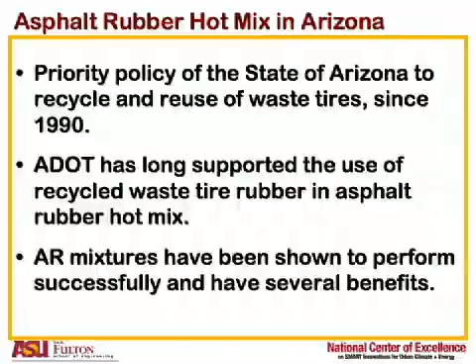I prepared this slide to show you, and by no means is this a comprehensive effort of what's going on. But when we talk about asphalt rubber, asphalt concrete friction course, and what we do at Arizona State University in terms of trying to understand the behavior of this material...

We have done some binder performance studies, looking at binder modification and how it improves the viscosity-temperature relationship at high temperature as well as low temperature. We looked at mix performance, and today we've seen a couple of very good examples of mixture performance and how the AR-ACFC actually performs in the field, as well as how we can capture that in the laboratory.

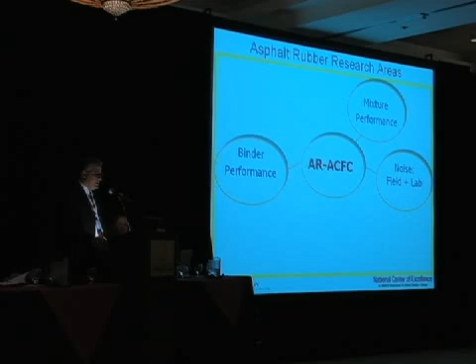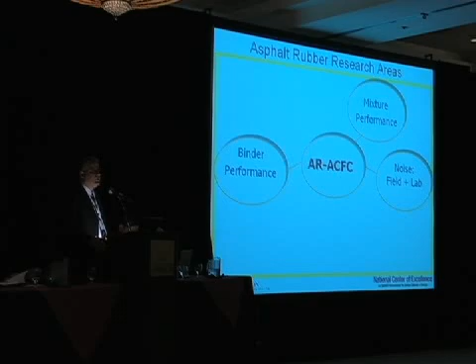You will hear later in this conference about noise issues. This has been touched upon earlier, but there are more in-depth technical papers looking at why the ACFC actually reduces noise in the field, and what we can do in the laboratory to capture that. So there'll be a couple of exciting papers on that later on.

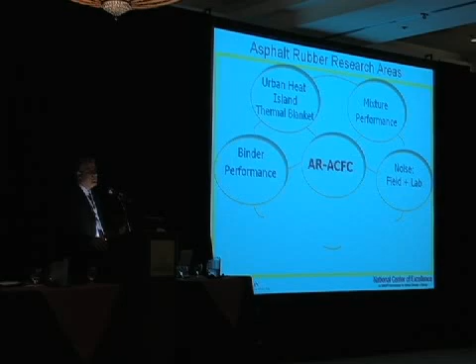On the urban heat island, Mark Belshe presented a very good overview of the heating phenomena or mechanism of pavements, especially in urban regions - the thermal blanket effect that's actually affecting what's underneath. That's another important area.

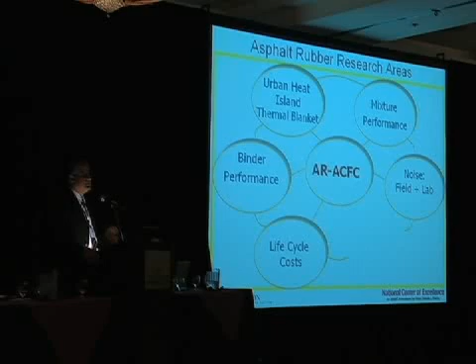I've seen, and we have done before, life cycle cost analysis. You pay more upfront for these materials, but if you look at the life cycle cost and maintenance issues, you always come out on top as a winner. And today, in the next 10 or 15 minutes or so, I'll talk to you about tire wear emission.

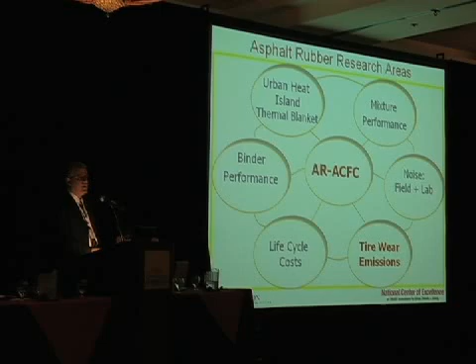How are those surfaces contributing to the air quality that we have in urban regions? This project actually started three years ago. I don't know if George Way is here - we were walking one time after a meeting and discussing with Professor Allen that most of the dust we have in the valley isn't really only dust. There's a lot of particles, a lot of pollution that comes from tire wear. So we were contemplating and thinking, well, can we do something to quantify that?

The whole idea, when we thought about it, was looking at whether asphalt rubber asphalt concrete friction course, the road surface layer, could result in less tire wear. And in fact, this is what we were thinking - it's actually going to produce less tire wear. Here I'm not picking on Portland cement concrete mixtures, because we do a lot of work in this area as well. It just happened that most of the highways we have in the valley are Portland cement concrete, and they are being overlaid with ACFC for noise mitigation.

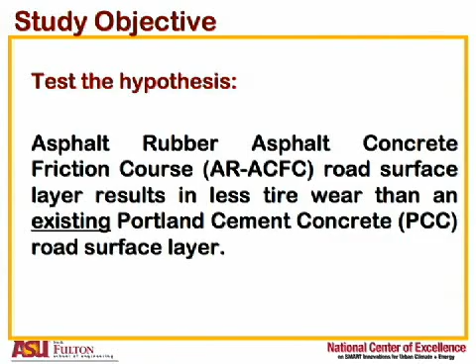So we have designed 4 tasks. The first one is looking at particulate matter, PM. If you are an environmental engineer, you know exactly what that means. These are emissions from on-road vehicle traffic during typical rush hour conditions on a highway. The idea is to do this for an ACFC and a PCC, before and after the overlay.

We were to collect and analyze samples in order to determine what pollutants we have in the aerosol. We needed to do some chemical analysis on the tire treads themselves, trying to identify what are some of those tire wear markers, what chemical compounds we can identify in our samples when we collect it. So that was an important task to include in the study.

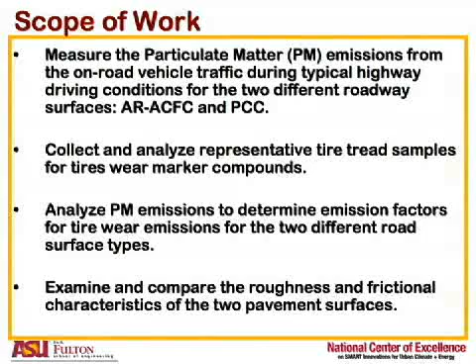We analyzed the PM emissions. We determined some factors, and we were able to determine the tire wear emission for the different road surfaces. So this is the analytical part, if you wish, as part of the scope of work here.

And then finally, we were interested to quantify something we have known or seen before, but we thought it's a good opportunity to look at the roughness and friction characteristics of these two different types of surfaces that we have.

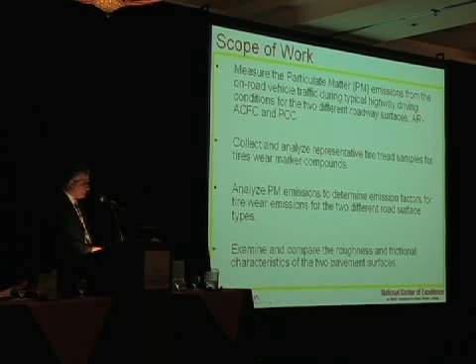Just a couple descriptions on PM itself: it's regulated by US EPA. You heard about this in the opening session from the lady from the EPA. It has been shown to affect human health, actually worsening the air quality in urban areas. A lot of times when we talk about PM, we refer to sizes, PM10 or PM2.5, in microns. So again, very minute, small particles suspended in the air.

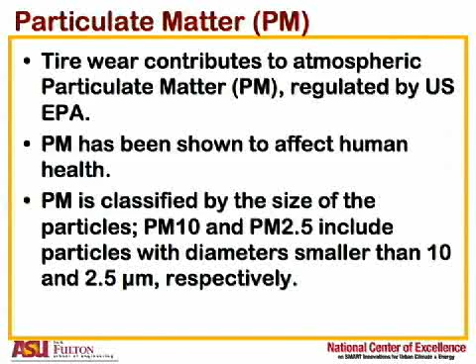Vehicle emissions are a significant source of both PM2.5 and PM10. If you consult the literature, a lot of studies, not specifically what we have done here, talk about the contribution of the different pollutants as part of the PM2.5 and PM10.

Advancement in vehicles, even if we go to zero emission vehicles, you are still going to generate some PM because of tire wear, road wear, brake wear, and so forth. And even some resuspended dust aggravated by traffic.

Typical values for tire debris in the literature, you're looking at about 5 to 7% of that PM10.

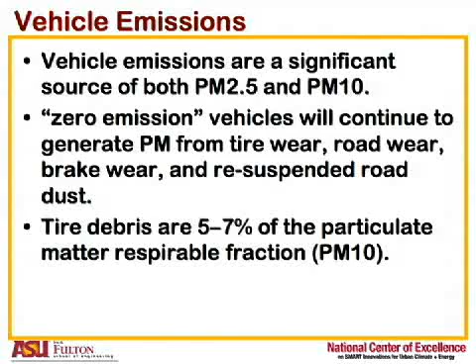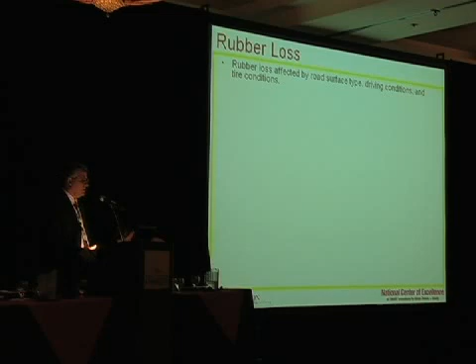So the rubber loss is really a function, or we believe it's a function, of the road surface type — at least this is the hypothesis we have in this study. Driving conditions might be another factor: traffic moving at a constant speed versus a stop-and-go situation. These all have to be watched for. And even tire conditions might be a factor in some of those emissions.

Here are some numbers: an estimated average of about 90 milligrams per kilometer, which corresponds to about 1.3 million metric tons per year for the entire US. It's quite a significant number if you think about it.

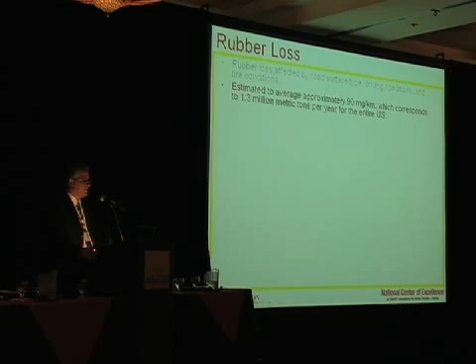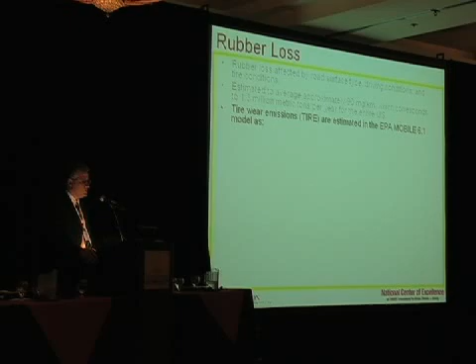Tire wear emissions are so important for the EPA. The EPA used tire wear emissions, indicated by this relationship, in the Mobile 6.1 model to estimate tire wear emissions. You can see the two components that go into the fractional particle size, the cutoff size, and the number of wheels, used in the formula to estimate the tire wear emission.

For example, a passenger vehicle is estimated to emit about 13 milligrams per kilometer of PM10 and about 0.13 milligrams per kilometer of PM0.1. I just want to paint a picture about the size or quantities of the measurements we are doing here in the study.

The Mobile 6.1 model can be used to estimate air quality for air quality modeling. The only thing is, for example, we have never measured anything like this for asphalt rubber pavement, so we don't know what these numbers are. So it's always good, if we can get the measurements, to have a better prediction in these models.

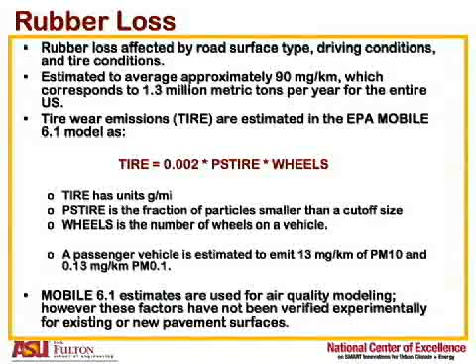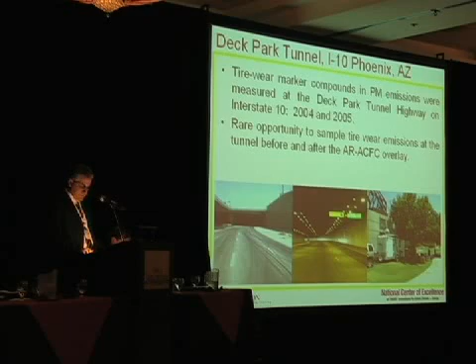Here is the experiment. Some of you are probably very well aware of the Deck Park Tunnel on the I-10 in the Phoenix, Arizona area. The picture is here on the left-hand side, at the bottom. This is the eastbound entry of the tunnel, just to give you an idea what it is.

If you look at the right-hand picture, on top of that tunnel is actually a park — that's why it's called the Deck Park Tunnel. The picture in the middle shows the tunnel. No, I did not stand in there and take this picture during traffic — it was closed for paving. You can see one lane of rubberized asphalt has been placed on the right-hand side.

There were two measurements done at this tunnel, in 2004 and 2005. We waited for about one year; we wanted to get all the initial wear from the surface of this material out of the question so we could compare only tire wear issues.

And again, this really was a good opportunity. ADOT was implementing this in the Quiet Pavements program because of noise mitigation, and we really took this opportunity to do the measurements before and after.

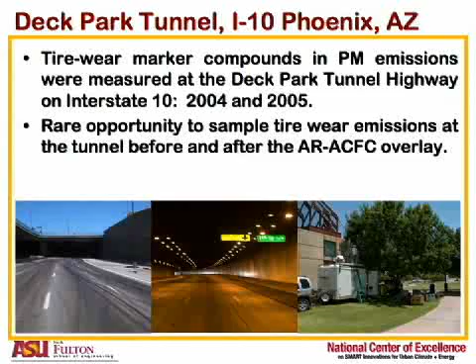Measurements. My colleagues, chemical engineers, they say it's rather simple. You use all this equipment. But what it really is, is a cascade impactor. It looks something like this one over here.

You put one at the entrance of the tunnel and use that as a reference for measurements, or somewhere you're not affected by the particles as much.

And what you see over here is actually the exhaust chimney. We've got a few of those on top of the deck itself in the park. We coordinated this with ADOT to collect air samples by turning the fans on, which are usually turned on in case of an accident.

The temperature is different in the tunnel itself. You can see here the aerosol sampling is being conducted from that chimney. It goes into a trailer, then into another impactor. What's in this impactor is a bunch of filters that can separate the different particles, so they can be taken back to the lab and analyzed chemically.

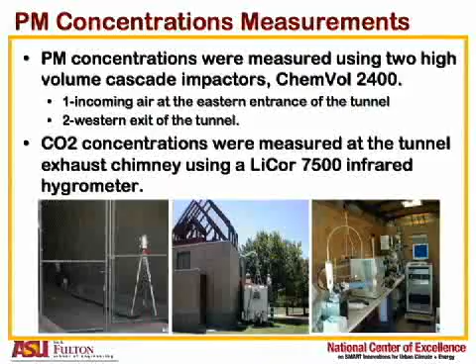Along with that, CO2 concentration was also measured at the tunnel. You see all the equipment housed in the trailer that is collecting all this, or the PM.

An important factor here is you want to make sure you have the same traffic volume, same traffic type, in 2004 and 2005. So what we did is we had to videotape.

ADOT has some counting loops in the tunnel, but we were not sure when they go on, at different times, and we weren't sure we'd capture them while we were there collecting the aerosol samples. So we relied on video cameras to collect this information.

Carolina can witness, it's really laborious work trying to take this video, put it back into a computer, and do a manual count of the traffic classifications and vehicles we have. What you see here is the westbound tunnel with the traffic exiting, which is actually being videotaped.

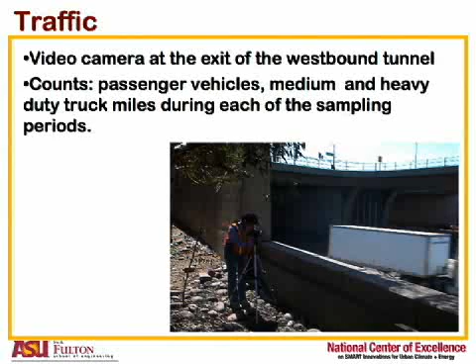Here we use the federal highway classification. We did some little adjustments. We thought it was okay to group some of those vehicle types, 5, 6, and 7, together following the federal highway guidelines. Same thing for groups 6 and 7.

So we did the measurements on the dates shown, May 27 and May 28. We came back a year later, around June 9th and 10th, and did the same measurements. I'm talking about the traffic volumes here, along with the aerosol sampling. And we went through the whole analysis.

We concluded that the traffic was fairly constant during each hour of the sampling period, and also there is no substantial difference between the 2004 traffic and 2005, which was good news. We don't have to make any adjustments in the calculations based on traffic.

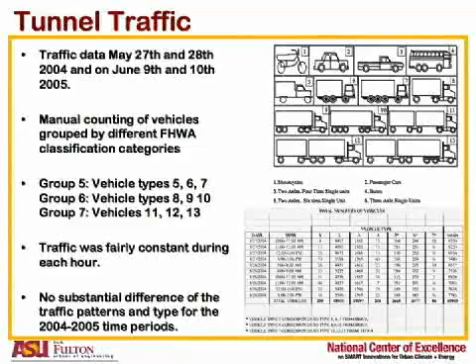One important part of doing the chemical analysis is trying to understand, when we get these aerosol samples, how we are going to identify which PM out of those is actually related to tires. So we were looking for tire wear markers.

We had to go to the crumb rubber manufacturing plant in Queen Creek, Arizona. We sampled about 30 tires or so, from passenger vehicles and from trucks and larger vehicles. We gouged the treads, collected that material, and came back to do the analysis in the lab.

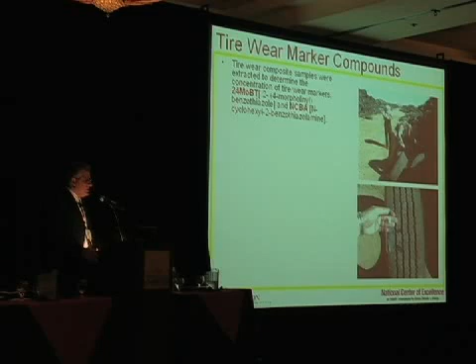What we were looking for is two famous compounds, and no, I'm not going to try to pronounce these: 24-MOBT and NCBA. These are historically related, by researchers worldwide, back to tire wear markers that can identify that the compounds or the PMs in the samples actually came from tires.

The analysis agreed with other work done in Japan, the US, and elsewhere. It's about 2.3 parts per million in particles of the 24-MOBT.

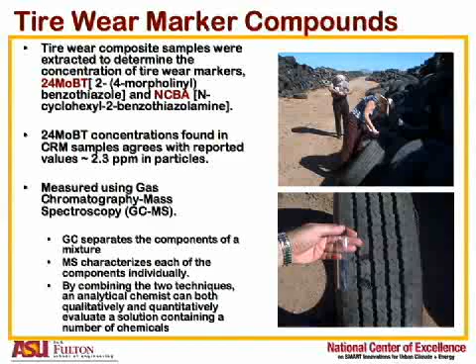We also used, to identify the chemical compound and just to assure ourselves, gas chromatography and mass spectroscopy, GCMS. Basically this is a device that can chemically identify the compounds we have been analyzing. So if you're a chemist, you want to do this to make sure these are the products we have.

There are other organic compounds, and we touch upon those in the paper, but basically we're looking for other organic compounds that might be present in the sample. They can actually be misleading, or they can serve as tire wear tracers, so we make sure we can identify those. And we did. We found aromatic rings, nitrogen, and sulfur as additional compounds in the samples that have to be identified and separated in a way.

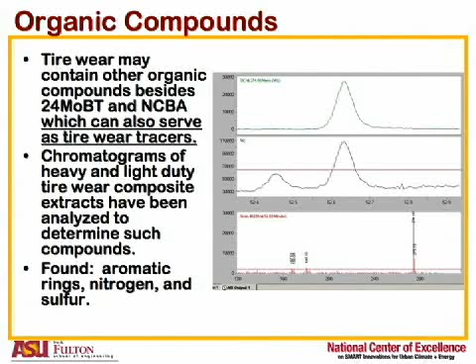The tire wear emission rates were calculated. You can use the tire wear markers or tracers we got from the tires themselves, and compare that to the fraction we have in the aerosol samples, calculating the tire wear emission from the inflow and outflow in the vent using that simple formula at the bottom.

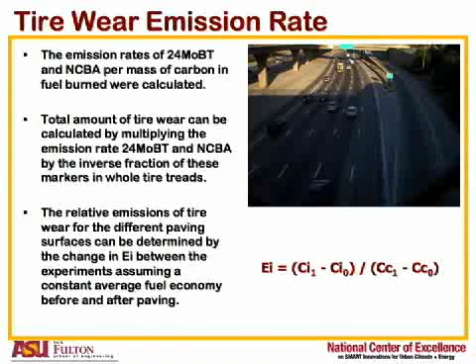Now those 24-MOBT and NCBA markers, the analysis showed that they are marginal, in that they are right at the detection limits, what chemists believe they are at the detection limits.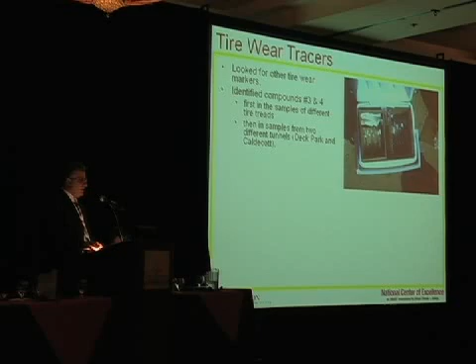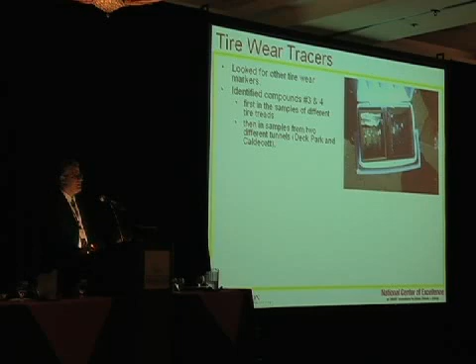So what Dr. Alexandrova did was really brilliant. She went back trying to find other markers in the study to identify other compounds we can rely on as better indicators. She identified two compounds, number 3 and number 4, referred to in the paper, and also identified those compounds in the tire tread samples we collected, making sure we have the same compound in both locations.

She and Dr. Allen both worked on the California tunnel, the Caldecott tunnel, and were able to identify that those compounds were also present there. They could not determine the specific chemical names for them, which is why they refer to them as compound number 3 and 4, but they are chemical particles that were classified and used as tire wear markers or tracers.

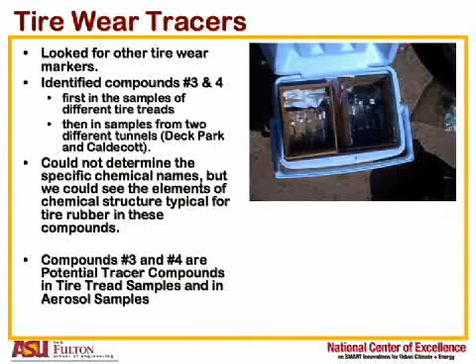This is really a summary of the results. The bottom line, because of time here, I'm just showing the 5 minute mark. If you look at the bottom table, compound number 3 and 4, which we believe are the tire markers in the sample we collected, you can see experiment 1, which was on the PCC road surface before the overlay.

You can see the micrograms per kilometer calculated from that, 354. I don't know why you don't see it well on my screen here, it says 177. You can't see it there, so this number here is 177. So this is before and this is after. Again, there is a difference in the tire wear emission rates calculated based on those two compounds before and after.

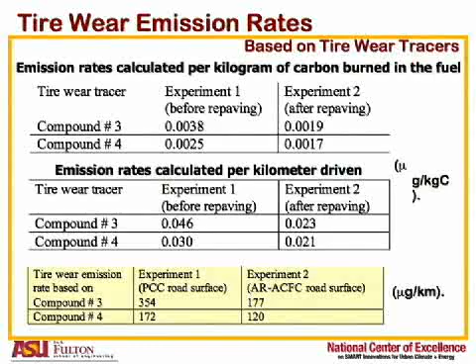PAH, or polycyclic aromatic hydrocarbons, if you are a chemist, you would run this to assure the quality of the measurements you're doing. Everything we're doing here is in micros, so you really have to spend a lot of effort assuring yourself the measurements are actually true to what they say. She identified about 8 organic compounds, and the conclusion from this analysis supports that the tire wear emissions calculated in the previous tables hold true.

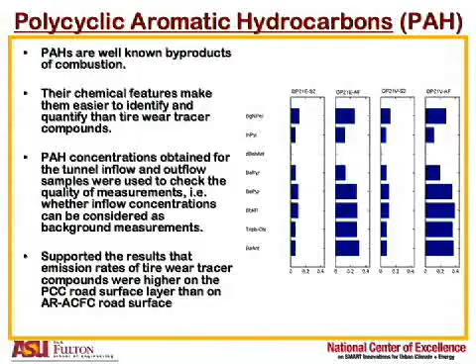Roughness: if you look at the IRI, inches per mile, we have seen a quite substantial drop, less than half, average about 95 inches per mile down to about 45 or 50 inches per mile. Again, before and after, this was the ADOT profilometer used, these are the measurements before, these are the measurements after, done for each lane along the tunnel itself.

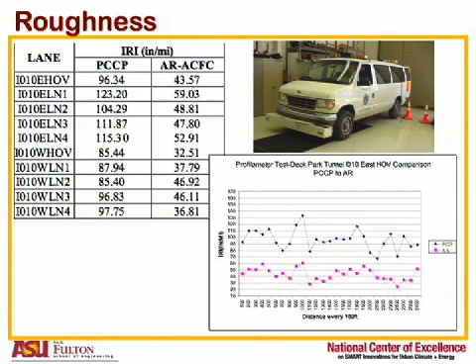Same thing for the friction value. ADOT uses the mu meter, a wet friction test. Again, this is a porous material, so you expect better friction values, no surprises there. In fact, you have better consistency in the friction values obtained after, comparing to before.

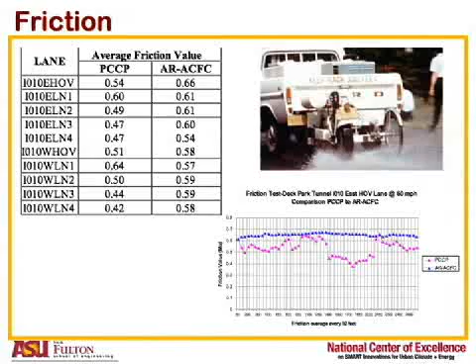Almost done. Conclusions. So we concluded from the study, and it's probably 20 minutes of presenting this, and even without Olga being here, it's probably unfair for the amount of work that really took place in this.

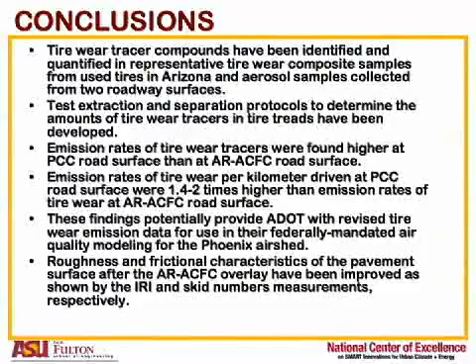But we have identified the tire wear tracer compounds. In this analysis we have provided to the state of knowledge about the procedures or protocols to follow in order to do this, which is very well documented in this paper. And we found out that the emission rates of tire wear tracers were higher before, at the PCC road surface, compared to after the overlay with the ACFC.

And they were about 1.4 to 2 times higher based on the calculation that we have done. We believe that these findings will potentially give ADOT some numbers to go by, which we did not have before, so they can use in the new air quality models that we have for the Phoenix airshed.

And again, no surprises there. Roughness and friction characteristics of the pavement surface are improved, as the numbers indicated.

We are open for discussions. We have 10 minutes, and we hope to have interesting discussions. That's the most important part of the conference.